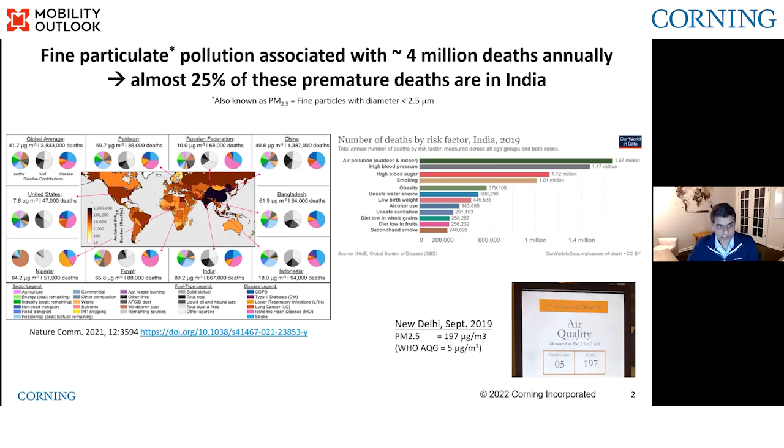Now, just to put it in context, 5 micrograms per meter cube is the current latest air quality guideline issued by the World Health Organization. India currently has an air quality guideline of 40. The World Health Organization, of course, has set more stringent standards of 5, but that's the level that's deemed to be necessary for healthy air. And you can see that 200 is not where we want to be, obviously. So more work needs to be done on reducing the pollutants. Okay, so much for that.

Now, just a quick overview of what we mean when we say exhaust emissions from tailpipe, right? So very broadly, first, just to get it clear, there are greenhouse gases and criteria pollutants, right? Greenhouse gases which lead to global warming, and criteria pollutants which I discussed on the previous slide, leading to health issues, right? Greenhouse gases are primarily CO2, which is the product of combustion, but then also methane and nitrous oxide, right? And methane and nitrous oxide are very potent greenhouse gases, which have multiples of CO2 in terms of the global warming potential, right?

So this left side is solved by improving efficiency of the combustion engine and other measures, right? We are focusing more on the right today, which is criteria pollutants. And that again is divided into 2. There's the gas emissions, which is CO, hydrocarbon, NOx, others such as formaldehyde, ammonia. These are increasingly being regulated as well. But then there's also particulates, right? And today there are 2 leading ways of regulating particulates.

One is the particle number standards that India has adopted, as have Europe, China, and many other countries. And then there's the US particle mass standard, right? So in the US, the limits are based on particle mass in milligrams per mile. In India, it is number per kilometer, right? The rest of these species are also in milligrams per kilometer in India. In the US, it's in milligrams per mile. So again, a difference in how these are measured, right? There are finer differences in the test procedures and so on, which I will hint at as we go.

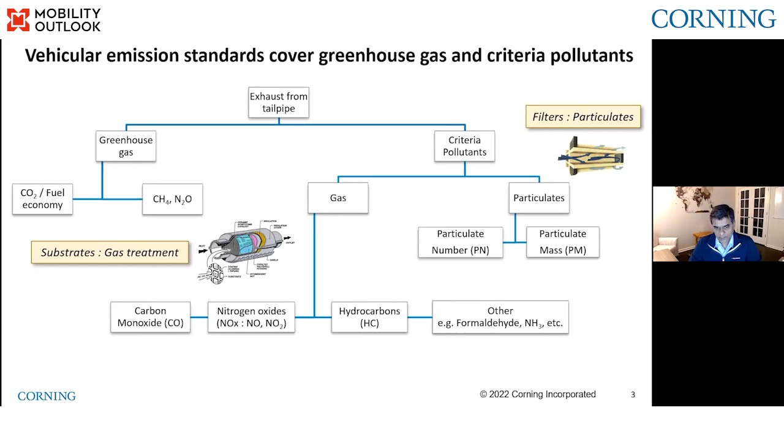Now, we as emission control technology suppliers provide broadly two classes of products. One is particulate filters, shown on the right, and I'll go into a little detail on that, and then substrates, and I'm showing one of those. The blue is one of those components there, which deals with converting CO and hydrocarbon into CO2 and water, right? So these are two core components of addressing the gas and particulates, right? So we'll talk a little bit about that. Yeah, very importantly, this still doesn't cover everything that's emitted.

So this covers everything that's regulated, but there's still more species that are not covered under regulations, such as black carbon. Black carbon is a component of soot, which has a very high global warming potential as well, but it doesn't have a specific limit in the regulations. Polyaromatic hydrocarbons, these are nasty carcinogenic chemicals, which are part of unburned hydrocarbons, but again, they are in very small quantities and they're not regulated today. Secondary organic aerosols and other emissions.

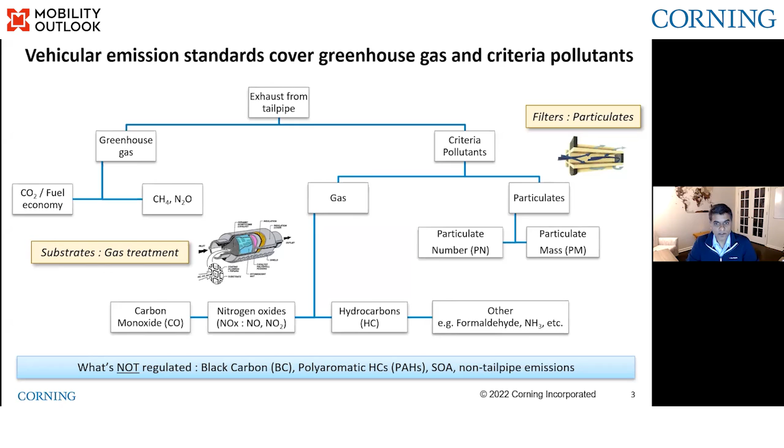I quickly mention non-tailpipe emissions here because it's important to keep in mind that now as we're going towards near zero tailpipe emissions, non-tailpipe emissions such as those from tires and brakes are actually becoming a bigger portion of the fleet emissions today. And those are going to continue even with electrification, for example. So something to keep in mind that this is going to be the next wave of issues that we grapple with. All right.

We've clearly started with BS6 in 2020, and BS6 stage 2 will kick off in 23. That's where the real world driving emission norms start. That's where cars are tested on the road as well as on lab tests. And in India, we still use the NEDC test cycle. In Europe and China, they've moved on to WLTP, which is more representative of real world dynamic driving. So I'm very confident at some point India will move to WLTP as well. It doesn't have to be at stage 2, it could be earlier, but it's an important change that will happen considering India is following the best practices in Europe.

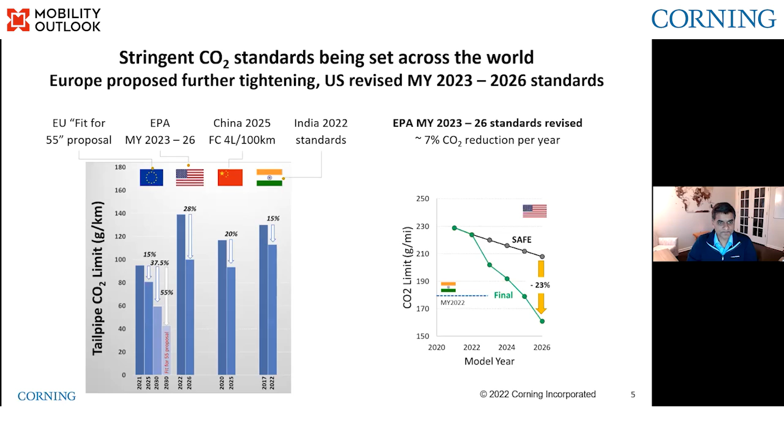So when you test a car on road, there's a certain allowance given for on-road measurement, because these portable measurement systems are typically not as robust as lab conditions. And that ratio between on-road and lab is what's called the conformity factor. Today the conformity factor is 1.5, for example, for particles in India, and for NOx it's similar, 1.43, and it's being reduced.

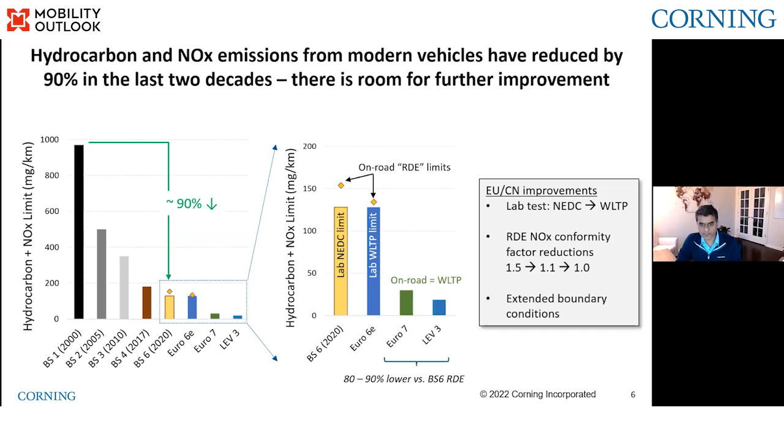Same thing with LEV 3; there are already LEV 3 cars on the road in the US, so it's showing what's possible. And finally, the extended boundary conditions that could be improved: the speeds at which the cars are measured, or the altitude and temperature boundary conditions under which these tests can be done. So a lot of improvements to the testing conditions are being made in Europe with each successive stage, and that could be pursued in India as well. Okay, moving on to particulates.

Now, particle mass limits have been traditionally applied only for diesels, for anything that has direct injection into the engine. So same thing in Europe. And starting with BS6, they apply to direct injected vehicles only. In Europe, these were applied since Euro 5, but India skipped that step. So it starts in BS6, for anything that has direct injection into the engine.

In contrast, in Europe, starting with Euro 7, or even in China 6, these apply for all vehicles, including those so-called port fuel injected vehicles, right? So there's GDI on gasoline and PFI: gasoline direct injected and port fuel injected. And the limits apply to both in China and in Europe, starting Euro 7.

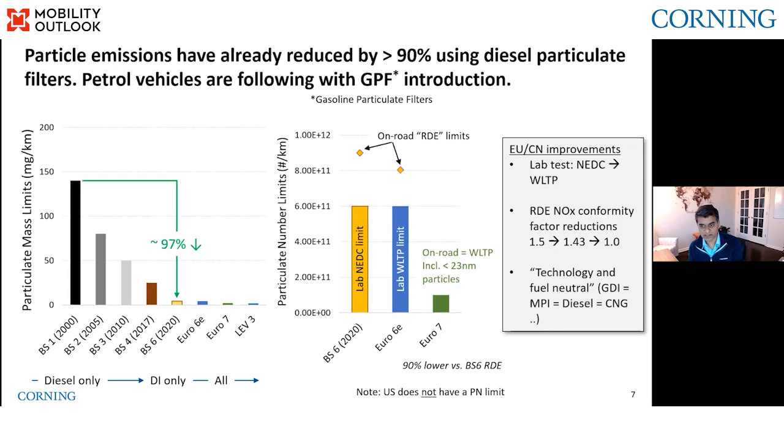And by the way, it's always been the case in the US, right? So there's one limit for vehicles. Doesn't matter whether it's a gasoline direct injected or a multi-port injected, or port fuel injected, or a diesel or a CNG or what have you, hybrids, etc. All vehicles have to have the same limit, and that is an important change. China is already following that in China 6, and so all vehicles have to meet similar limits, right?

And then, so what does that all mean from a technology perspective? So a very quick primer on the products that we offer here for emissions control. Shown on the left is a schematic of what the underbelly of a car looks like, and we typically refer to two locations where these catalysts are added. One is close coupled, which is closer to the engine, and the other is an underfloor position. So you'll have catalysts in these two positions typically. Underfloor is slightly further away from the engine, so it takes more time for the catalyst to warm up in that location.

So as I mentioned earlier, we have these two products. These are all ceramic substrates and filters we're talking about. So flow-through substrates, as they're called, because these are flow-through channels. As you can see here in the middle, those are channel openings, and these are very fine channels. The nomenclature, like 400/6, refers to 400 cells per square inch, and 6 is the wall thickness in thousandths of an inch, right?

So 6 mils, or 6 thousandths of an inch, the wall thickness. So you can imagine these are very fine channels, very thin walls, and also we can play around with the porosity, pore size of the wall structure, right? Again, how it works is shown on the bottom.

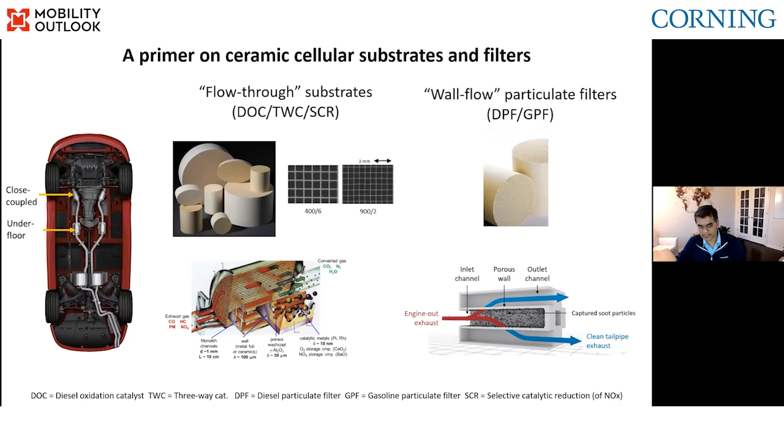Connecting to what Dipanshu was saying earlier with what Willard said, we have done this for a long time in Europe and China, and now obviously doing this increasingly in India with BS6 norms, right? So these products are fairly advanced, and we continue to improve them for Euro 7.

The main changes now coming, right, are both from a system level, but also from component levels, right? And I'm trying to bring that out here. So if you look at the modern petrol aftertreatment systems, we've traditionally had a three-way catalyst, right, which converts gases, CO, hydrocarbon, and NOx to CO2 and water.

Moving forward with Euro 6D, but also I would say BS6 stage 2, typically at least the GDI vehicles would have a gasoline particulate filter. Again, it's similar to a diesel particulate filter, but a filter for gasoline applications, and gasoline is petrol. And so, that's being added in India for some of these vehicles, right, which are regulated.

Looking further to Euro 7 like systems, there are many ways of addressing the more stringent regulations. One could be adding another three-way catalyst, adding the wash coat load, more catalyst, and so on. By the way, one comment, I'm showing the GPF very schematically here. It could be in the underfloor position as well, or it could be in the close coupled position, and it could be bare or coated with a catalyst.

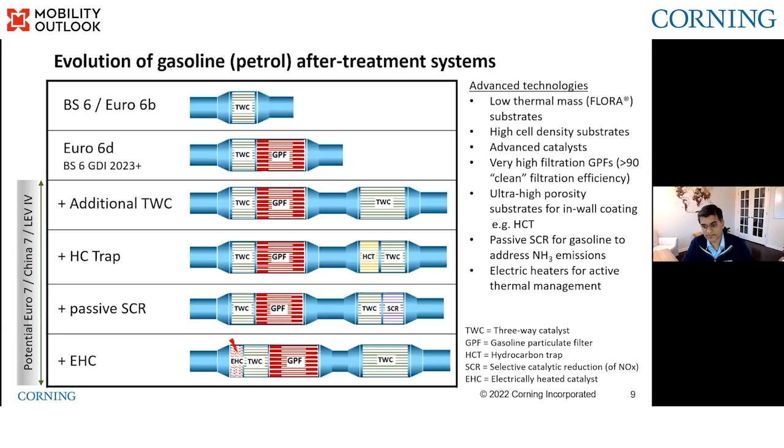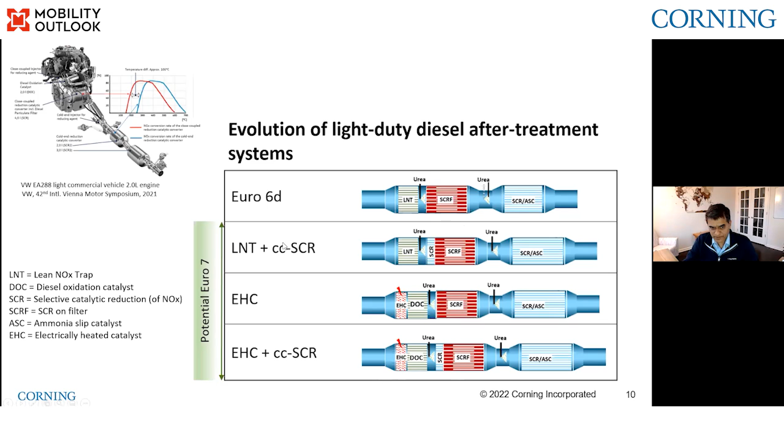Okay, so I know that was a lot of content, but very quickly in 5 minutes, I will talk about heavy duty. So similar to light duty, regulations are proceeding on heavy duty. California is leading the charge here with these ultra low NOx regulations. This is perhaps the most complex regulation on the heavy duty side, requiring up to a 90% reduction in NOx compared to the 2010 standards in the US, which are already fairly stringent. So this is going to be a very massive change in terms of the technologies that are going to be added.

But again, this phases in, there's a first step in 24, then in 27, and then there's more changes in durability, etc., that are part of that regulation, which we won't go into today. Nationwide, the EPA is also coming up with its own version, the Cleaner Trucks Initiative, which should be closely aligned with California. And then in parallel, there's greenhouse gas regulations in the US as well, which are happening.

So again, an important consideration, whether it's heavy duty or light duty, is that all of these reductions in NOx and particles have to happen without really affecting the fuel economy of the vehicles much, right? And that's the challenge that OEMs are faced with, right? Similar to light duty, there's a multi-pollutant rule that's being discussed on heavy duty for beyond this decade.

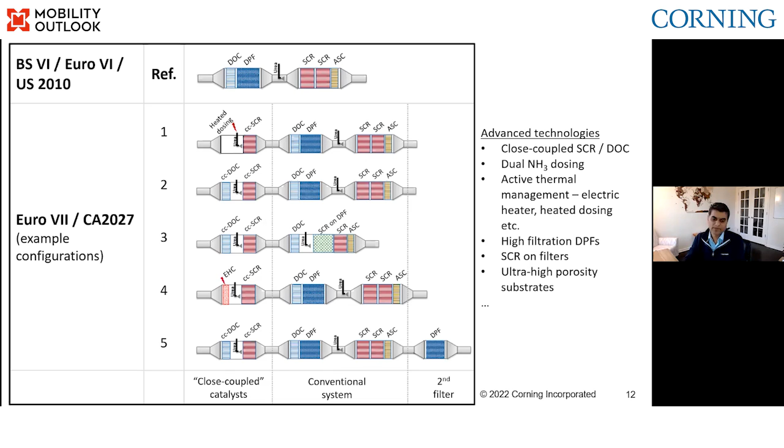Just wanted to put it out there that these systems are quite complex, but they are really taking us towards near zero tailpipe emissions, right? So I won't go through the list on the right, but you can see basically all of these different components adding up. One thing quickly, maybe high filtration DPFs. So yes, again, similar to light duty, filters are improving on heavy duty, and very, very high filtration will be required for meeting the upcoming standards. Yep. So I know that was a lot, but I will stop now and see what questions you may have.

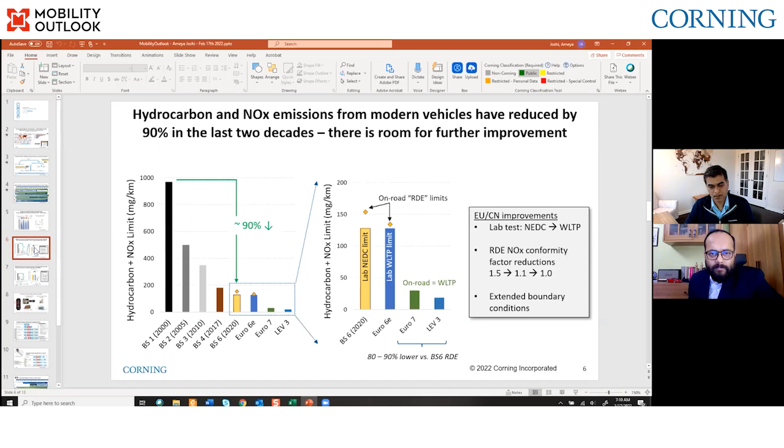Yeah, so I think the theme across the world nowadays is that you want to make sure that these vehicles are emitting the same on the road as they are under the lab conditions, which are typically more well controlled, right? And so what that would mean is essentially reducing these so-called conformity factors. Making sure that you have good instrumentation to actually measure on the road, and then of course making technologies that meet these limits on the road. So that is the main difference. I would say the other is making sure that the lab test cycles are themselves very well representative of real driving. So again, this change from NEDC to WLTP is very important.

Even in the US, there's a lot of changes every time there's a regulatory step, and there are changes being discussed there. And then I would say again, the main focus today should be cold start emissions, right? And it is. So making sure that the emissions in these first couple of minutes after you turn on your car are reduced is going to go a long way in making sure that the overall emissions are reduced. And again, that comes through improved standards, but also improved technologies that would help get the catalyst warmed up sooner.

All right. Worldwide, Ameya, there's been a big question over the viability of diesel as a technology. Yet, there are new technologies being developed that continue to make diesel engines cleaner and more efficient. Right now, what's your assessment, both from a global and Indian perspective, as far as diesel technology is concerned?

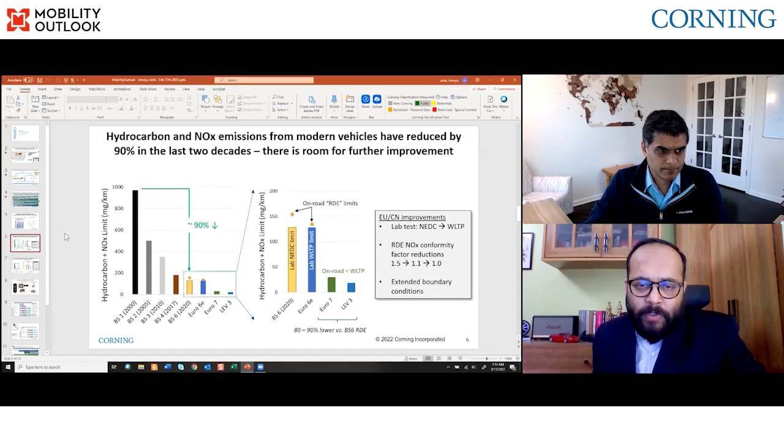Yeah, so I think we are going to see a significant increase in the powertrain options that are available, based on consumer preferences, policy decisions, and so on. And I just pulled up this slide because I did want to highlight this. I think it's very important to follow this global trend of having technology and fuel neutral regulations. So making sure that whether it's a diesel or a CNG or whatever, similar limits are proposed, and then that's followed. And this whole idea of making sure that all of these vehicles are as clean on the road is very important.

I think these various options are going to be available and will play an important role in meeting various requirements. As an example, on the heavy duty side, CNG is seen as a very important technology for low NOx, and that's clearly reflecting in an increasing share in CNG. I would also highlight hybrids as playing a very important role. You'll see that hybrids are increasing their share as the fuel economy regulations are strengthening across the world.

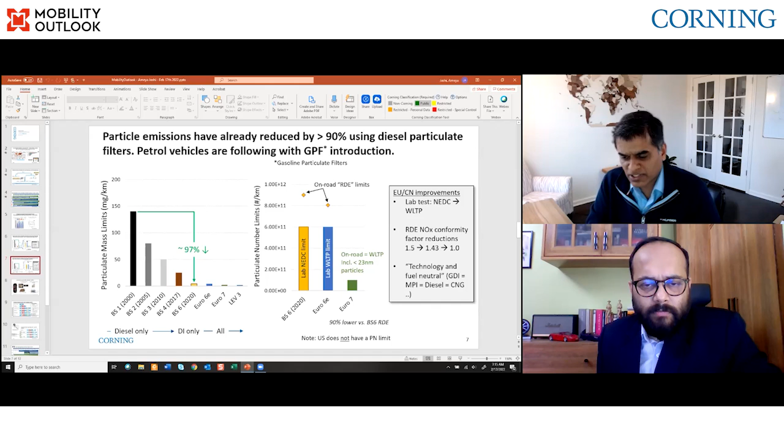And then of course there's electrics, which are seen as an important part of the OEM portfolio, again to meet CO2 requirements. But policy decisions will play a very important role in how quickly each of these are growing in their own market share. But yeah, I think it's going to be an interesting decade. We're going to see all sorts of powertrain options being offered and grow in their own segments.

Right. Specific to commercial vehicles, the heavy duty segment, do you expect to see different kinds of emission regulations for different classes of CVs in the future?

Yeah, so heavy duty vehicles are different from light duty, in the sense that you can develop one engine, but it could be used in a very different application. The same engine could be used on a school bus or on a garbage truck or on a heavy duty long haul truck. And you can see that being reflected in how Europe is, for example, treating these in Euro 7. You do have important distinctions on both the durability requirements and the tailpipe limits for medium duty vehicles versus heavy duty, long haul vehicles. So there are differences both in terms of the actual limits and how long these are on the road.

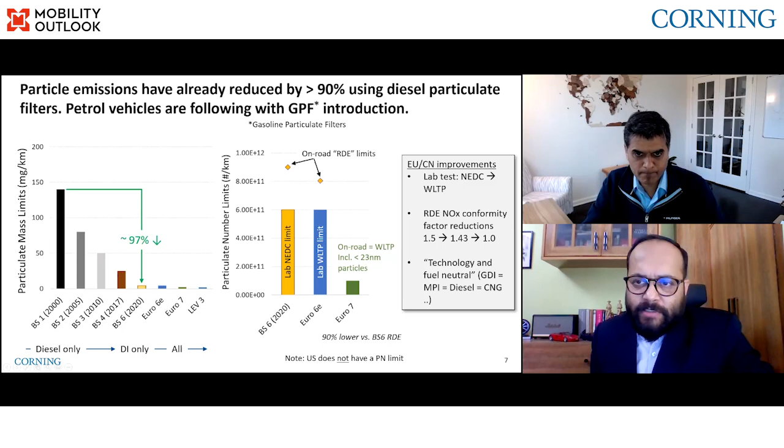Wonderful. One of your comments which generated quite a lot of interest today is about non-tailpipe emissions. What are some of the initiatives taken to mitigate such emissions in vehicles? That's a good question. Unfortunately I'm not very familiar with all the technologies being discussed in that space. But clearly there's two. The main is tire wear. Tire companies are coming up with improved tires, which have more resistance and are not being abraded as readily as tires today. So that's one.

For brakes, there are new systems being developed, and I've seen a few out there, which are little vacuum systems right at the brake pads, where as soon as these particles are generated, they are sucked up by these systems. So again, making sure that the emissions right at the source are addressed, either through improved materials or through mitigating systems. Of course, these are very different from tailpipe technologies. But it's an important source. Most policy makers, in Europe, the US and others, have shown that starting 2030-ish, you're going to see non-tailpipe emissions exceeding the tailpipe ones for particulates.

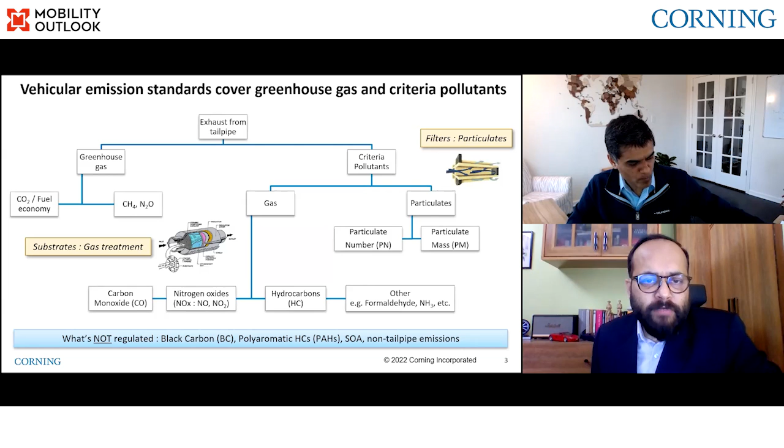Okay. I'm going to take two more questions. One is from our participant today, Paul Crickman. He wants to know, do you or Corning expect GPF design, porosity, size, etc., to evolve further to handle potential Euro 7 limits? Or is current design and technology likely sufficient?

So we certainly see the need for high filtration efficiency increasing, and we are adapting to that. The designs are changing primarily at the microstructure level, the wall and pore structure level. We change the porosity to make sure that the filtration is very high in the clean state. Remember that when you have a little bit of soot and ash on the channel, it acts as a further filtration mechanism, so filtration can be very high very quickly. But when it's clean, the filtration can be not as high. So we are making sure that is improved as well. Also, of course, design changes in terms of sizing according to the needs.

But just to quickly share something, I used to be a technology manager for Japan and Korea. When I was interacting with customers at that time, when we were just beginning with Euro 6, customers would all say, we don't think we really need GPFs anymore.

Then they start saying, well, we think we need them maybe, with 40-50% filtration should be enough. Then we started hearing, no, we need 75-80%. And now with Euro 6 fully enforced and with further improvements, now we are hearing, well, we need 95% plus efficiency right from 0 kilometers. So that improvement in GPFs has actually been a very significant part of our development, and it really continues. I think that's going to continue.